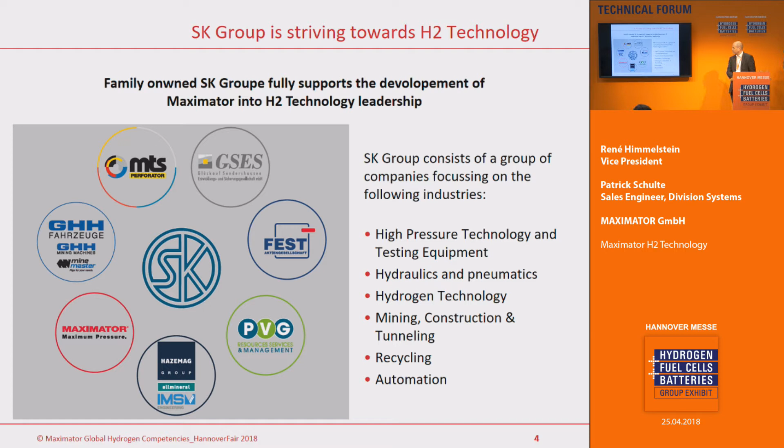Let's start with the Schmidt-Kranz Group. We are a family-owned company, already in the fourth generation, which means there's a lot of history, but we are also looking into the future with a lot of visions. This is a quick overview of the whole structure. We come from the mining industry, and we have ideas to bring hydrogen technology into that industry.

We have one company called GHH. They build dumper trucks, digger trucks, and drilling machines, and we want to implement fuel cells into these machines, since batteries make no sense at the moment. This is a big goal for us. We are also the owner of a big salt mine, and we want to bring hydrogen technology into the salt mine as well.

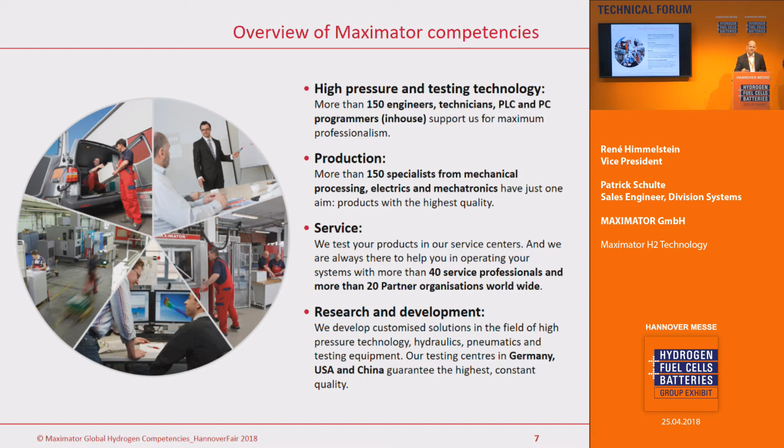What about Maximator? We are 700 people right now, 400 in Germany, 300 all over the world. High pressure technology is our main focus. We have a lot of engineers, a lot of production, and a big service group, with more than 40 people in service, which will be important later on if we have filling stations around the world that need servicing.

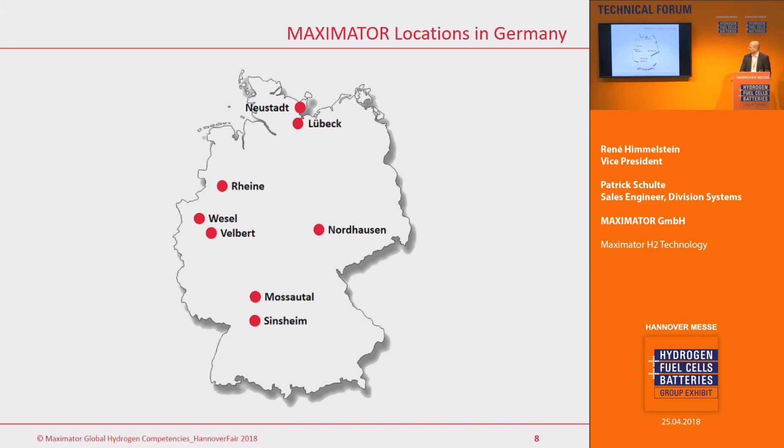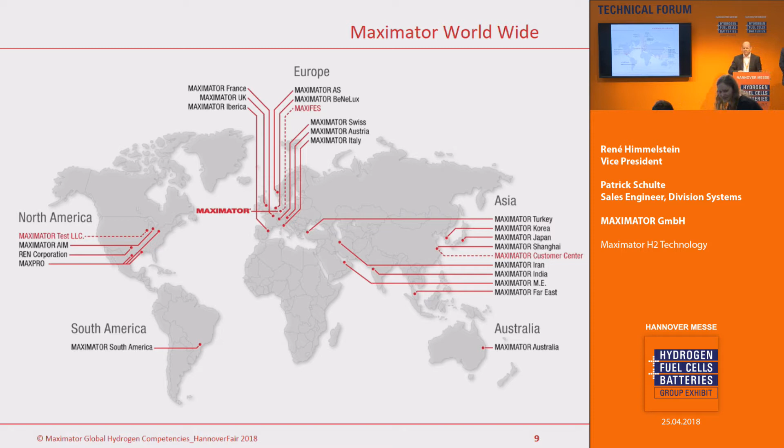This is an overview in Germany. Our headquarters is in Nordhausen, and all other places are sales offices. Here is our global footprint. As you can see, it's well done. We are so-called German Mittelstand, not that big, but the global footprint is very good. We opened an office in Iran last year, and Saudi Arabia will be on the agenda this year too, since Saudi is also looking into H2 filling stations.

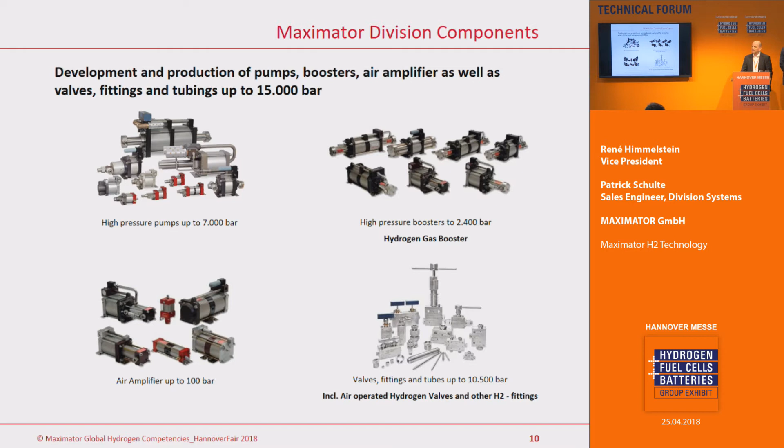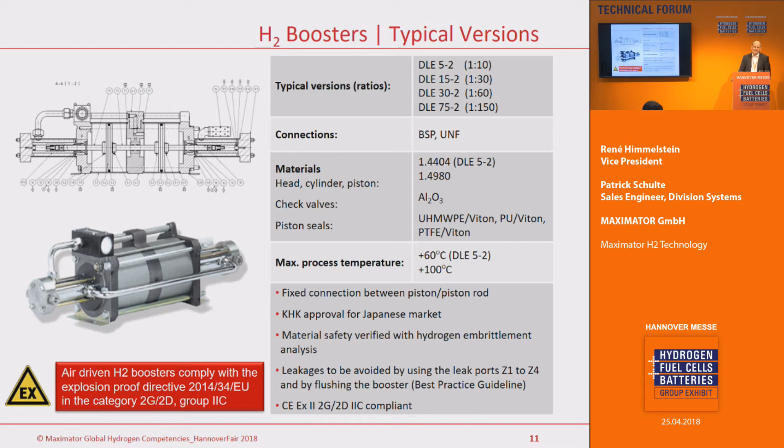We have 4 divisions, and I'll go through this quickly. This division is called components. We've been active in the hydrogen market since 2006 with products like small boosters. We equipped many filling stations for Air Liquide back then, and still use these devices today. We also have high pressure fittings and tubings, and every fuel station must be equipped with these.

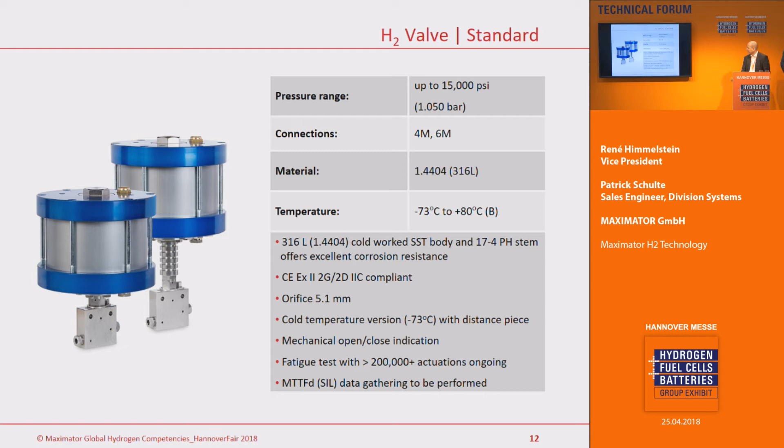These high pressure valves you will find, for example, in Linde filling stations, and we are talking to all of them. We also do coning and threading of tubes and fittings, as I mentioned before, and we have the right machines to do this cone and thread work.

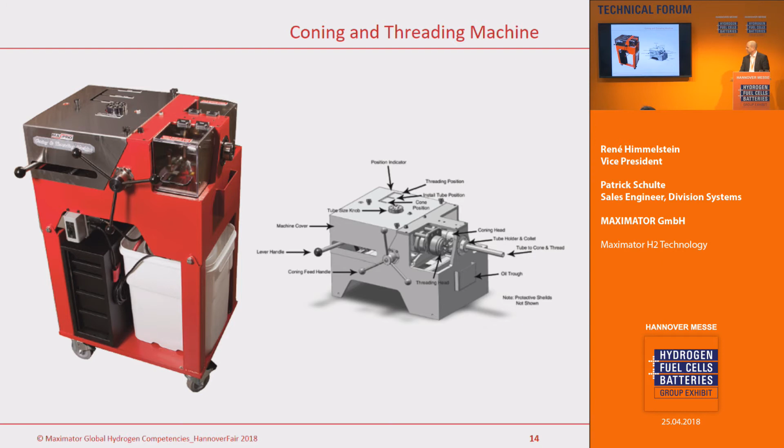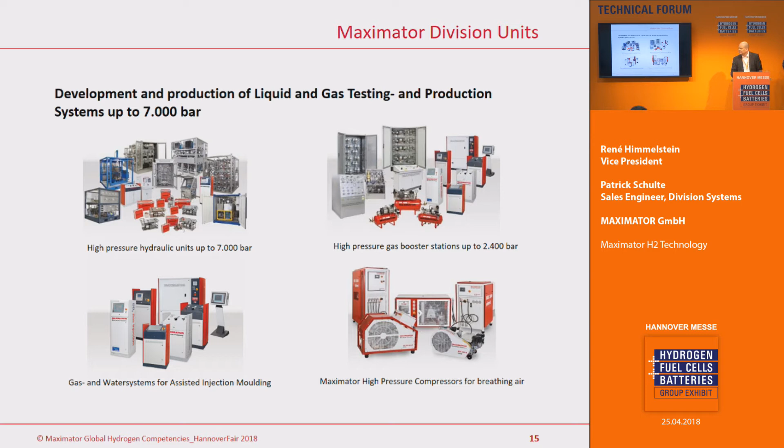We have another division that will build the hydrogen filling station itself, called the units division. I'll give you a quick overview. We also do a lot in oil and gas with really complex systems. We know how to handle this business, and therefore we are prepared.

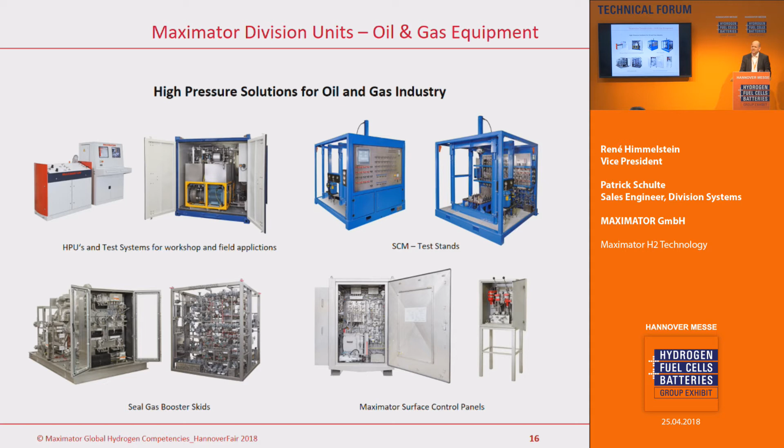Service is really important for us, because if you want to bring hydrogen filling stations into the market, you have to serve them and be responsible for them. Therefore we have a big service organization. Just two examples: one in North America, where California is really important for hydrogen, so we are well prepared. We have 5 companies right now over there, and I can tell you, we will rock the market over there for sure. We're also in a position to open a complete service organization in California.

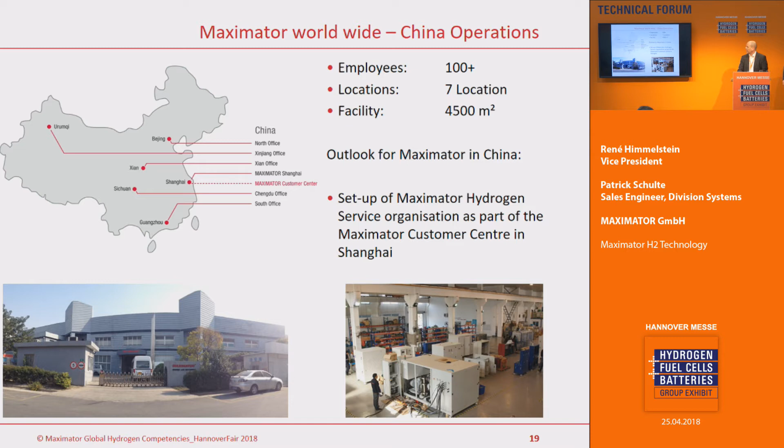The same is valid for China, where we have 100 people right now. So that was the global overview. Now let's look to the future. What are we doing? What is our vision? As I told you, Maximator is the mother company and will build all the filling stations. Then, last November, we opened Maximator Advanced Technology.

Going a little bit into Maximator Advanced Technology, all the people involved in the hydrogen business know Robert Adler. For me, he's a kind of genius. He has a lot of patents, and he's been working in the hydrogen industry for 30 years.

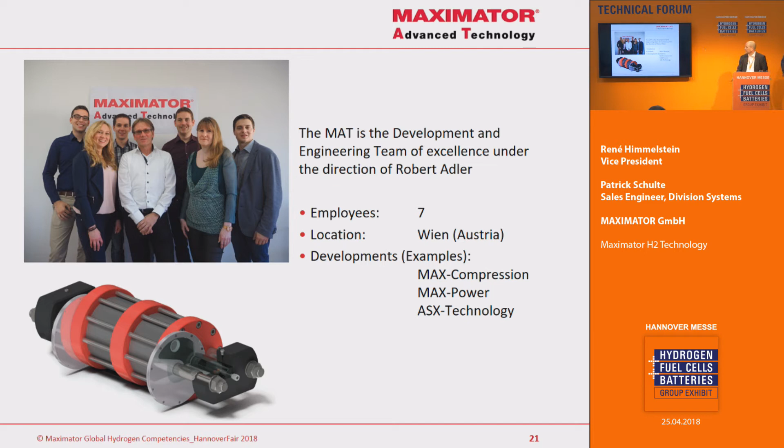This group is starting now for us, and they will do a lot of fancy things for us. Our goal is to come out with a complete hydrogen filling station, cost-wise really low, with really good and fancy components. This team in Vienna will develop all these components for us for the future. That's our goal and vision.

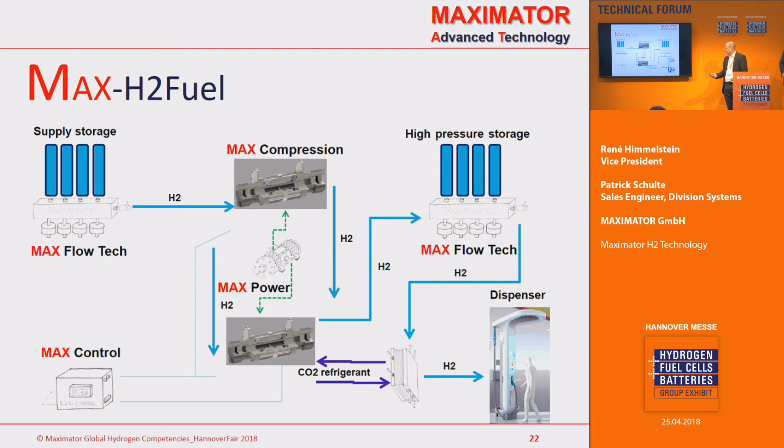At the moment, we are working on max compression and max power. I will explain a little bit later on what that's about. Here you have a complete overview: max power, max compression, and they have a lot of knowledge with seals, which is really important for the compressors later on. Flow tech control and max cool. So we have a lot of ideas for the future.

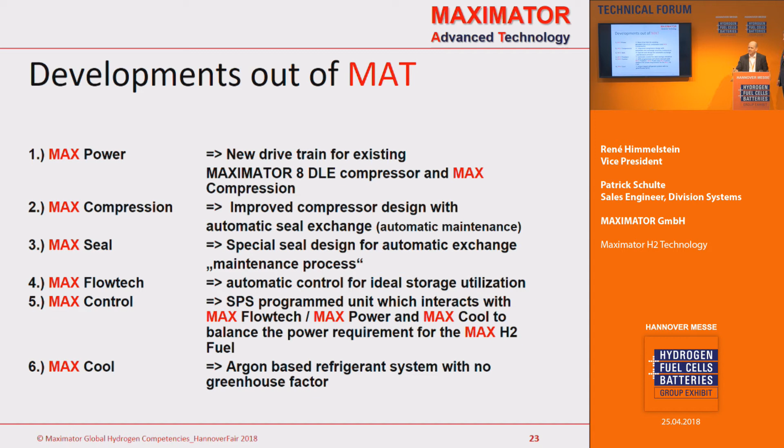Actually, we have the 2nd generation for hydrogen filling stations already in place, but now we start with max compression. You can see it also on our booth. It's a completely new air-driven system, with an efficiency of 100%. Everybody should now start laughing, but it's really true, and we can tell you why on our booth. The compressor will be ready, I would say, beginning of next year.

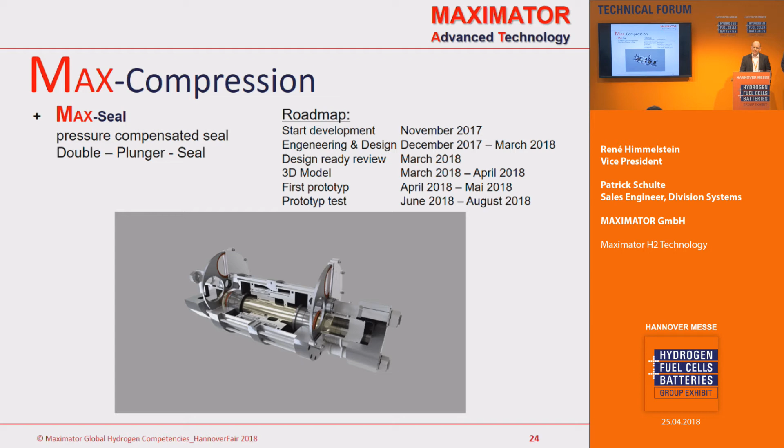We are starting the testing of the seals at the moment, and this is ongoing. Here you can see a nice picture. The most important thing for you to know is that we have an automatic seal exchange implemented into the compressor system. You can see here is a kind of revolver, and here you have the high pressure piston.

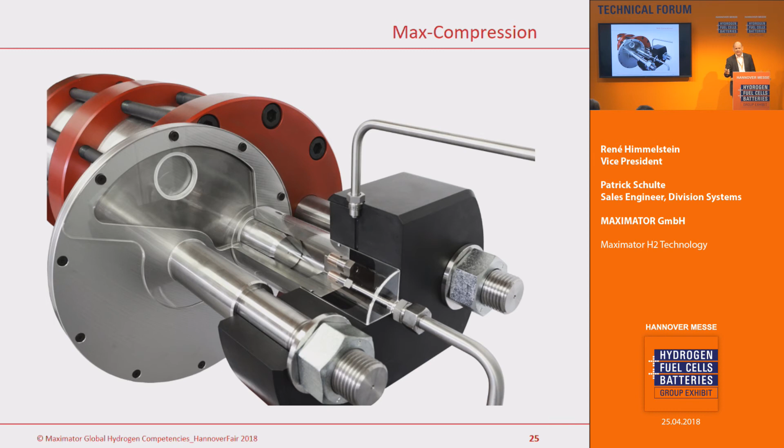If we see a leakage, we have a kind of leakage sensor inside, and if we see that the leakage is getting too high, we do a repositioning and bring in the new sealing. We have 4 sealings inside this revolver blade, which means we can drop down the OPEX cost dramatically, because at the moment the biggest problem running a hydrogen filling station is that you have to do maintenance on the compressor quite often. With our new system, you can save a lot of money.

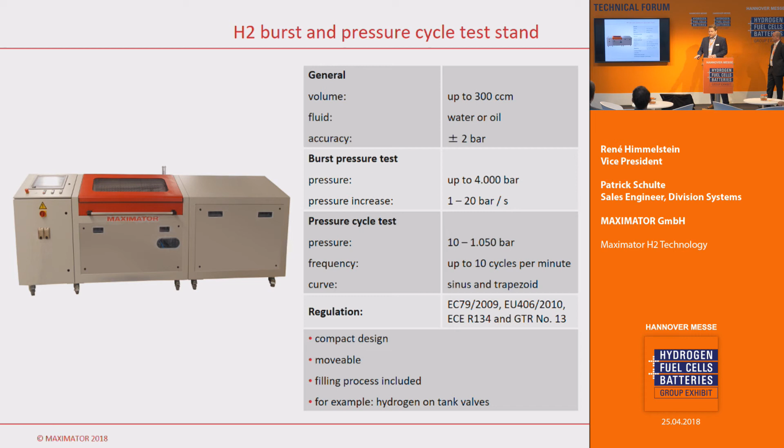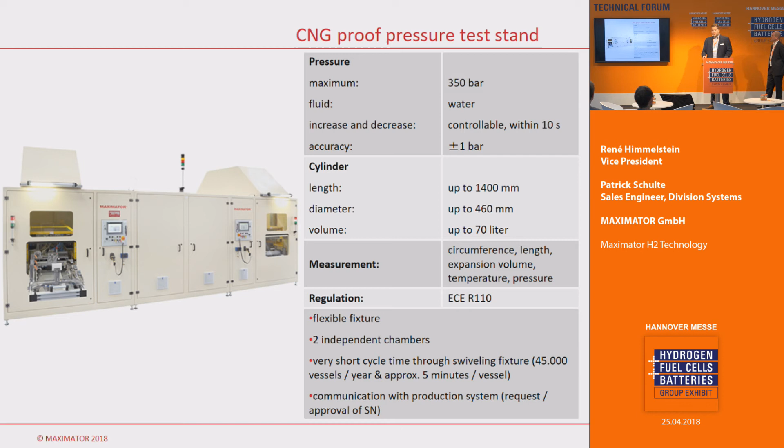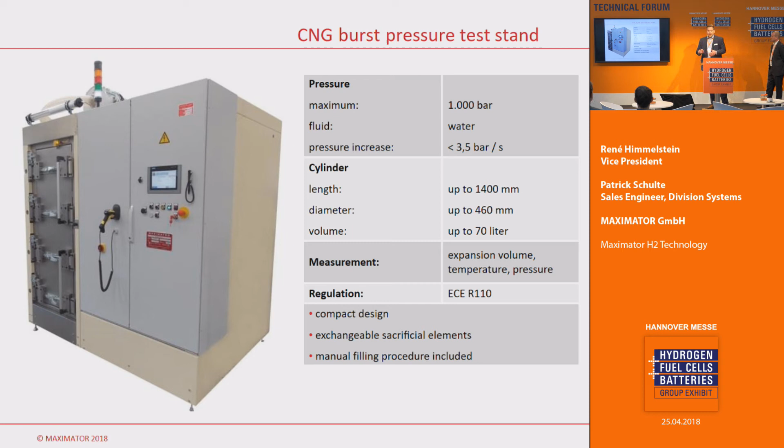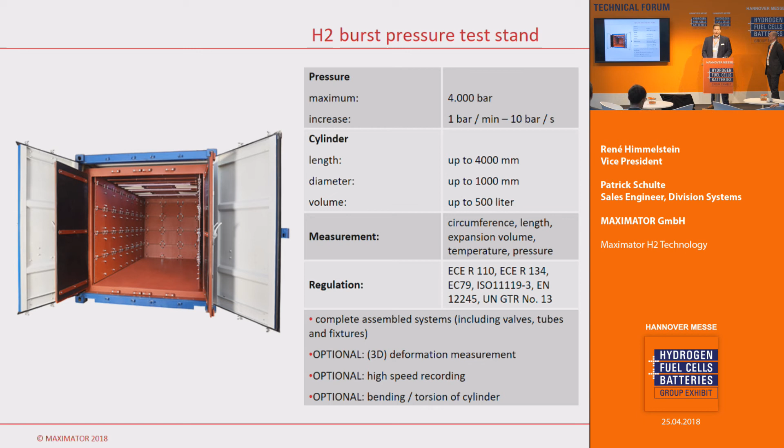We have here the same project, it was responsible for the burst testing of those vessels. While production of those vessels, you have to test some of them for bursting, and you check if the production is correct. Here we have a flexible test stand in our laboratory in Nordhausen. It is a very big chamber where we are able to perform burst testing, for example, or pressure testing on very large vessels, for the heavy-duty industry or so.

We have here a new concept for smaller vessels. This is right now in the engineering phase, and we will start assembly within the next month.

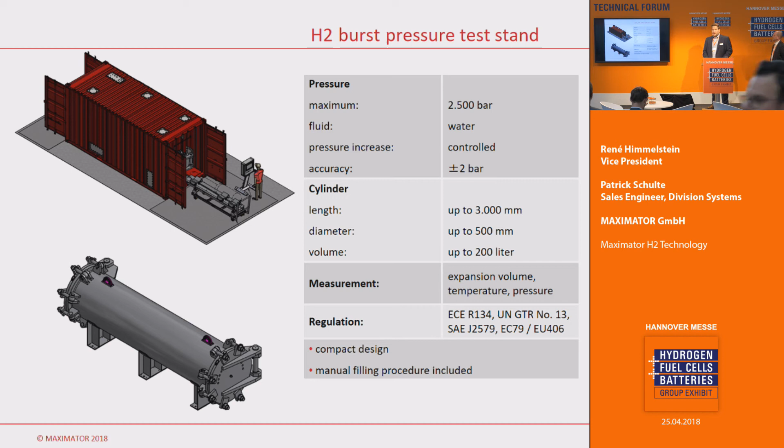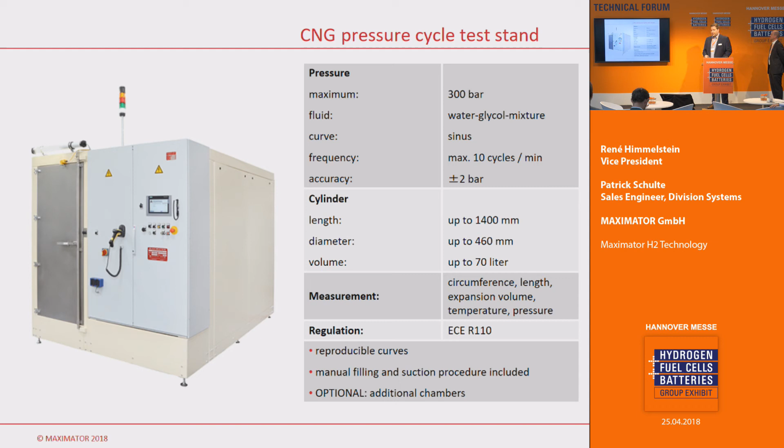Same project as I told you already for the Audi. It's CNG, and the pressure vessel will be tested here for their lifetime while being produced. This is a test stand we already built in 2002, more than a decade ago. It is designed to have a certification test on composite pressure vessels at low and high temperature, and it is located in Berlin at the Federal Department for Material Testing.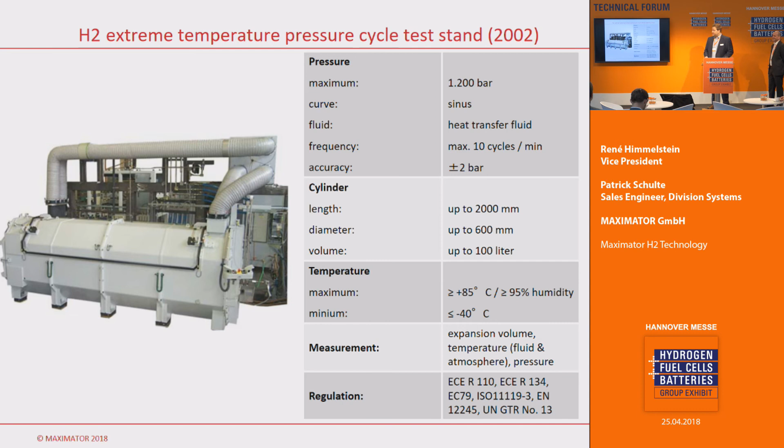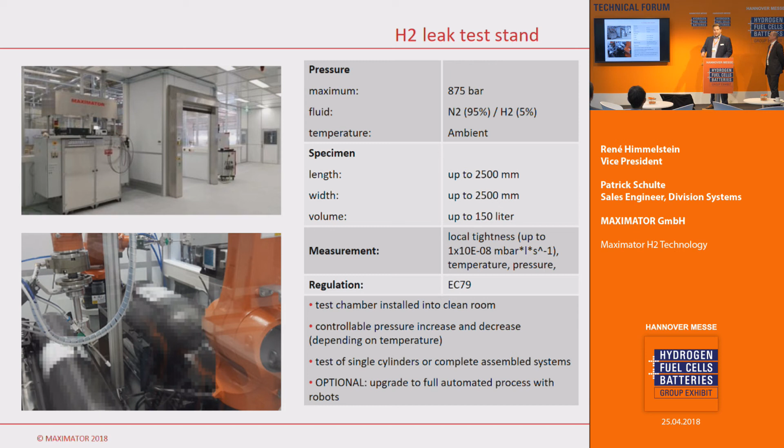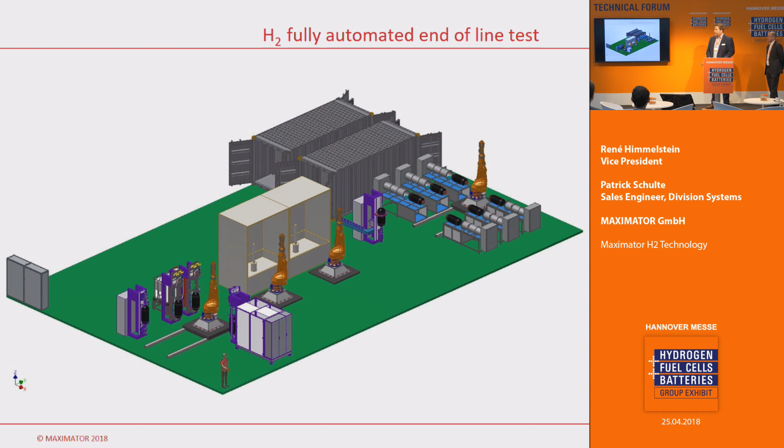We have the same test stand in a view of today, so the technical aspects changed, and we have designed it completely new. This is a hydrogen leak test stand we built for the end of line. The cars, the vessels will be installed in a car which stands right in this hall at the NOW common stand. This is our idea how to make a serial production when you raise up the number of cars, since each car often has more than one vessel. You start with a proof pressure test, then you have washing and cleaning, and later on you have the leak testing, which takes a lot of time to decrease the gas, to get the gas out at the end.

I will just go through now. We have here the service department where we do testing as a service in Nordhausen. So when you have any component which needs to be pressurized or temperized, you could get in contact with us. What we see here is a video of a high pressure, high speed recording of a burst testing of a composite pressure vessel.

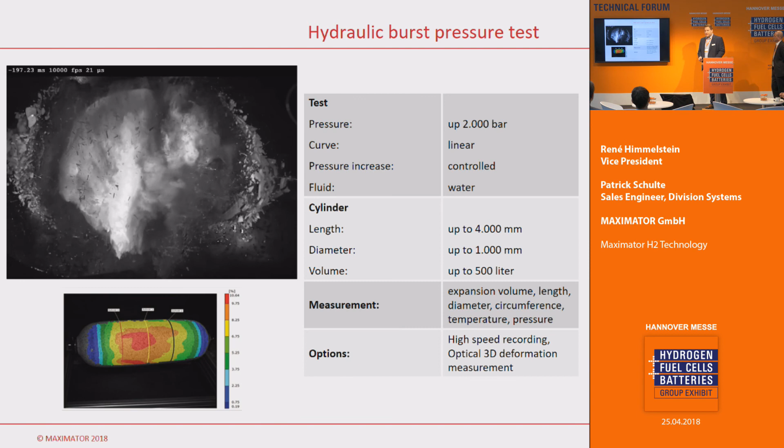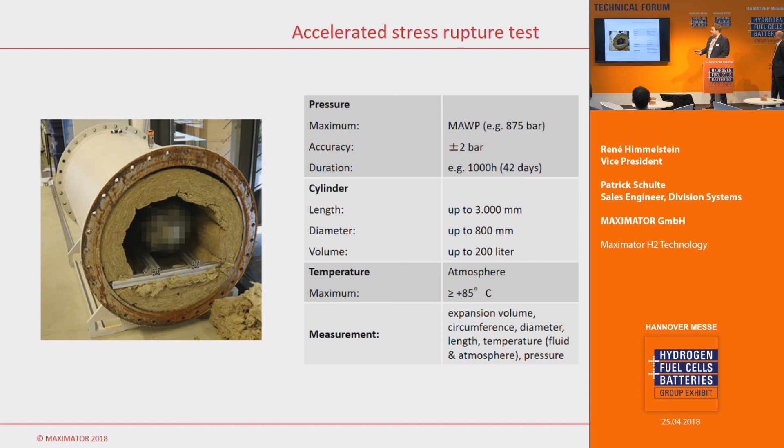We also do pressure cycling with pre-treatment, for example, drop test or chemical exposure. And here we have the test under temperature, and we do the accelerated stress rupture test, bonfire test, and one test is very important, which René also mentioned: the test at TestNet Engineering.

We acquired that company last month, and we will set up a hydrogen gas cycle test stand within Germany. As far as we know, that test is very rare in the world, so we will create a new opportunity. The special chamber you see there is able to resist a burst under gas pressure, 150 liters at 1,000 bars. That will be very unique, you will never find another chamber able to resist that. We will be ready for operation in the beginning of next year.

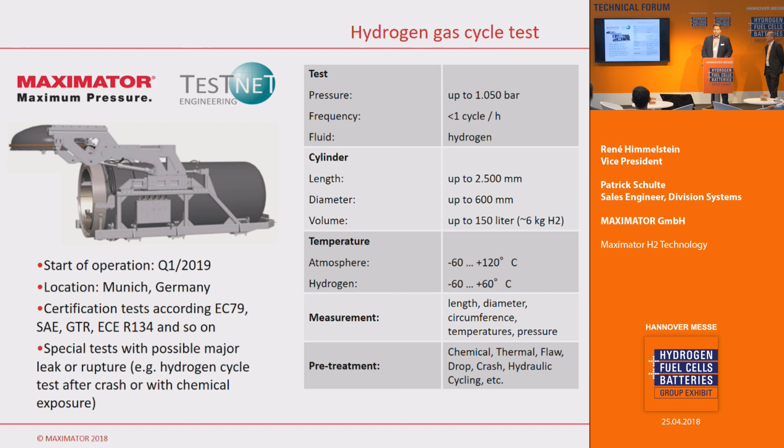And thank you both so much for that presentation. At this point, if we have any questions, I can bring the microphone down so that we can all hear you. All right, well, while you guys are thinking about what you might like to hear from them...

Mr. Himmelstein, you mentioned that one of Maximator's priorities is creating a low-cost hydrogen filling station. I was curious, what sort of steps are you taking to ensure a low cost for your customers? The thing is, we will design all the parts by ourselves, so we are not just purely assembling. We are doing the design for the parts for the filling stations, and we are using a lot of thermodynamical processes to minimize the costs for the complete filling station as well as to run it. So it sounds like by producing your own pieces, it ends up dropping the costs a little bit.